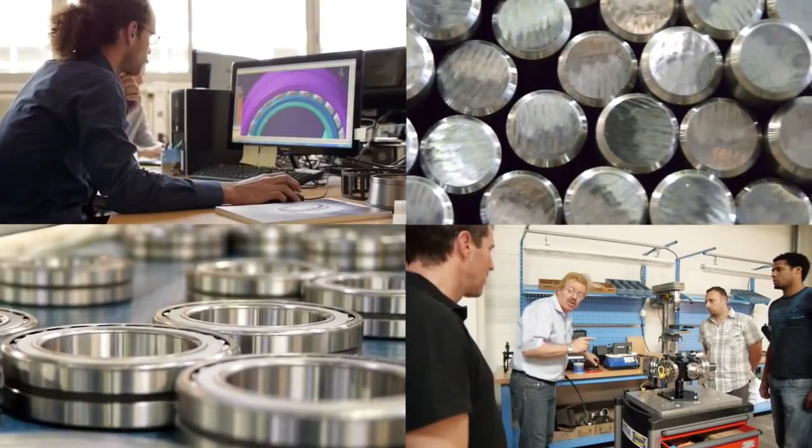The NTN Corporation, the third largest bearing group in the world, is a leading player as both a developer and a manufacturer of bearings for the industrial, aerospace, and automotive markets.

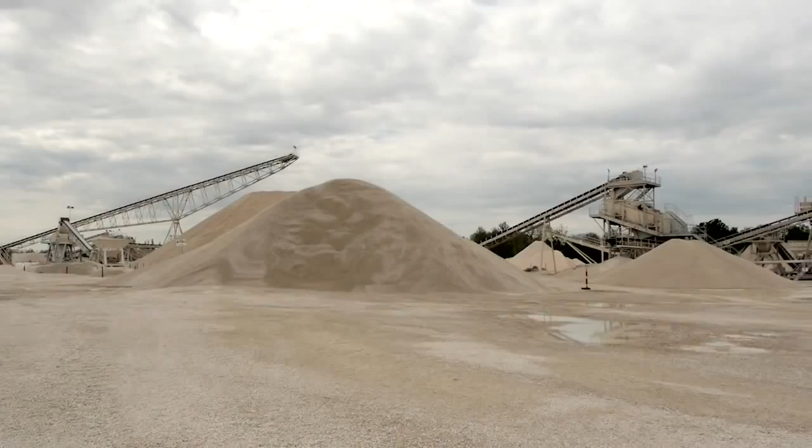In the sector covering mining, ore processing, and the cement industry, bearings operate in an environment that really puts equipment to the test. Many operations take place outdoors, and machinery is exposed to the elements throughout the year. In addition to the elements, bearings must also withstand the mechanical demands required of it during production. Impacts, imbalances, vibrations, combined loads, high rotational speeds, and extreme temperatures.

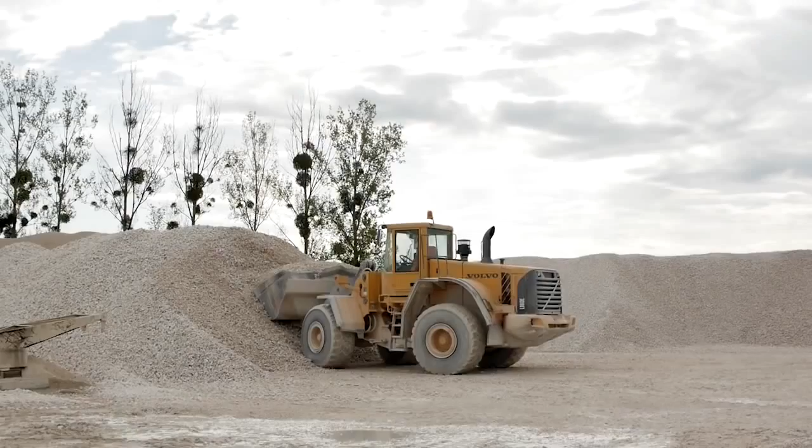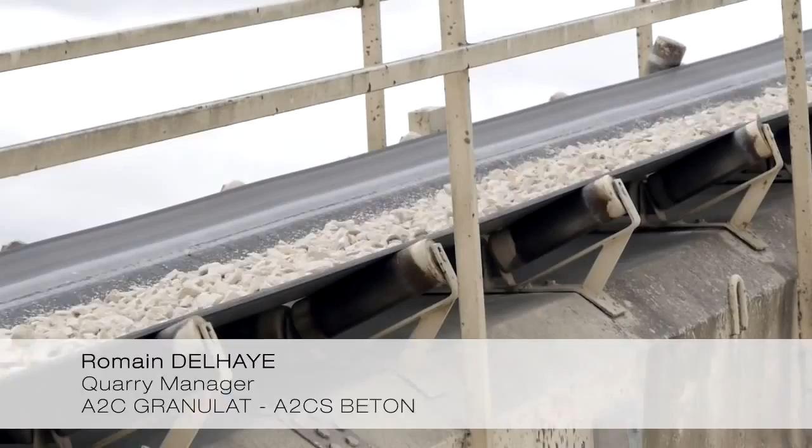Daily output is measured in thousands of tons. The machinery operates on a continuous flow basis and often for long periods at a time, leaving little time for maintenance. Our installation is subject to very high production demands, making availability for maintenance limited. This is why we fit our machine components, in particular the bearings, with the most reliable and durable equipment possible.

Crushers, screening machines, and conveyors. At each stage of the process, bearings play an essential role in a particularly demanding environment. NTN has designed a range of spherical roller bearings capable of handling extreme conditions, vibrations, impacts, and imbalances.

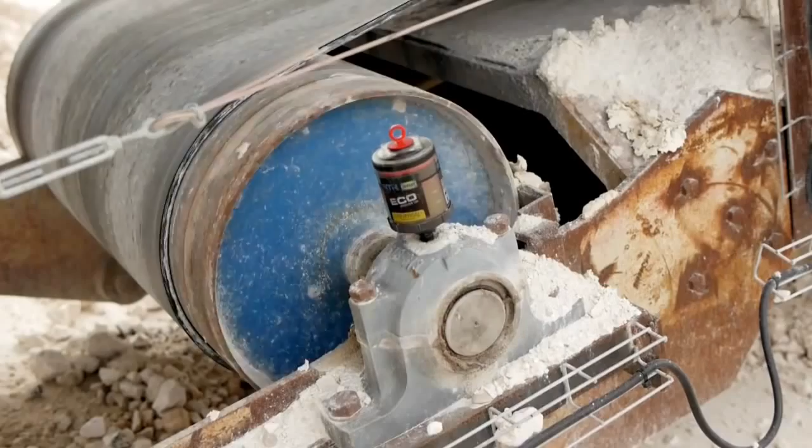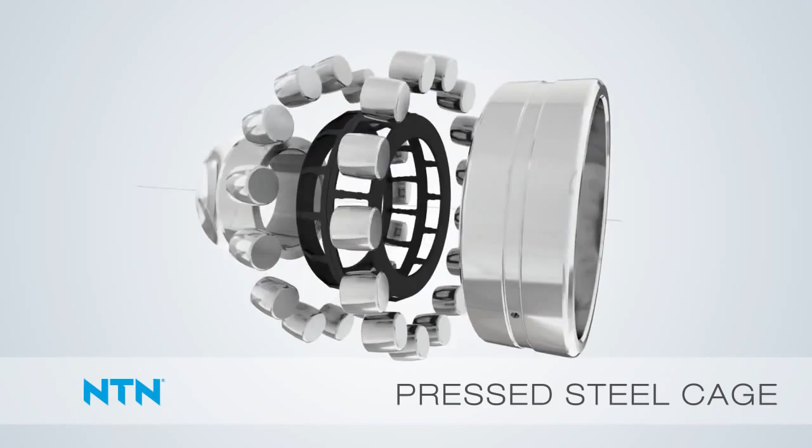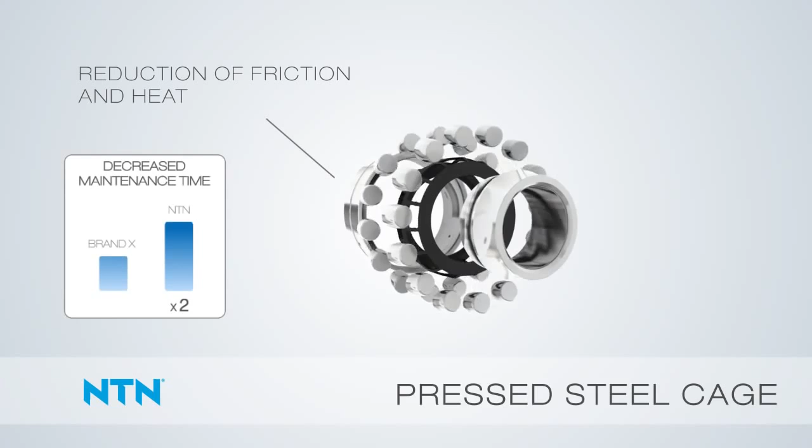Our belt conveyors are subject to stress that is both environmental and intrinsic to their operation. Within their spherical roller bearing range, NTN offers reinforced steel cages which are able to withstand the associated stresses within the conveyor itself. NTN provides a complete solution thanks to our two-part plummer block with its seals and lubrication. The steel cage reduces friction and overheating. This increases the service life of both the bearings and the machines, and that means less maintenance.

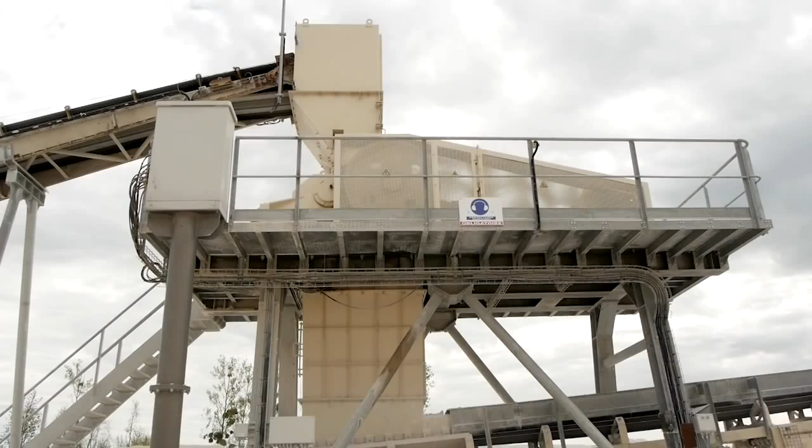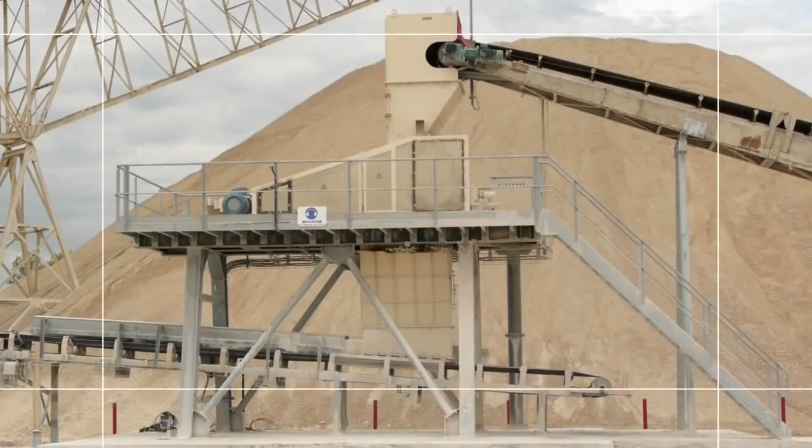The role of the crusher is to reduce the size of the extracted product to produce semi-finished ore that can then be graded on the screens. The crushers are subject to radial stress due to the large amount of impacts and vibration. NTN has developed a range of spherical roller bearings able to cope with this stress. Large-size bearings with machined brass cages are used in the crushers.

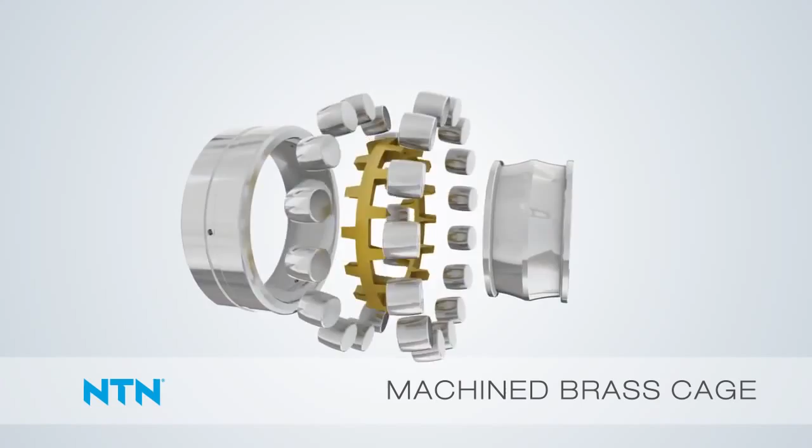Double-row spherical roller bearings from the EF800 range offer a greater load capacity and a longer service life. This is achieved through a reduction in bore, outer diameter tolerance, radial clearance, and by optimizing the size of rolling elements.

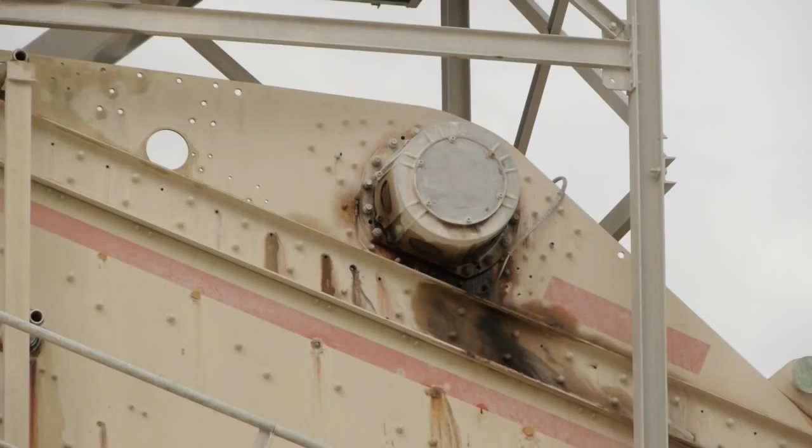The screener's job is to grade ore. We pour the ore onto the screens. Then we use vibrations so that the ore runs off. The vibrations are created by what we call exciters. They are fitted with bearings that are subject to impacts and vibrations. NTN has developed a range of bearings specially designed for screeners.

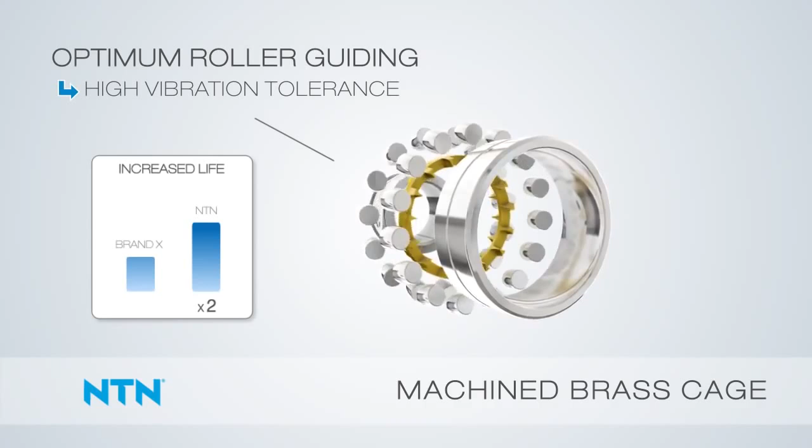The double-row spherical roller bearings in the EF800 range have greater clearance so they can withstand major impacts and vibrations. The solid brass cage has a contoured profile which wraps around the bearings, improving their guidance. This means they can cope with extreme vibrations. These features guarantee a longer service life in your machines.

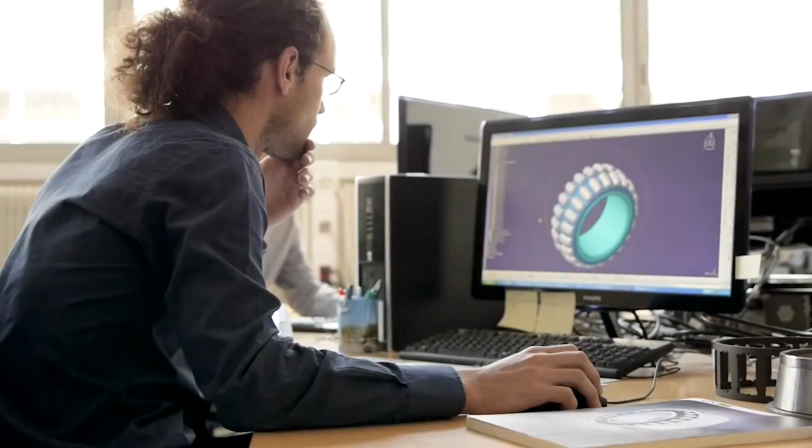We have seen a real increase in on-site productivity thanks to the quality of NTN spherical roller bearings. NTN's spherical roller bearing range offers improved performance. In our R&D center, hundreds of people work on the bearings of the future. They are equipped with numerous laboratories and a test center with more than 200 test benches at their disposal.

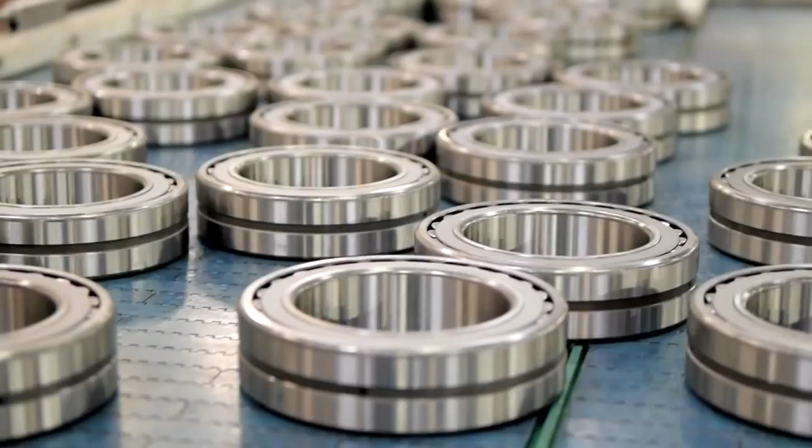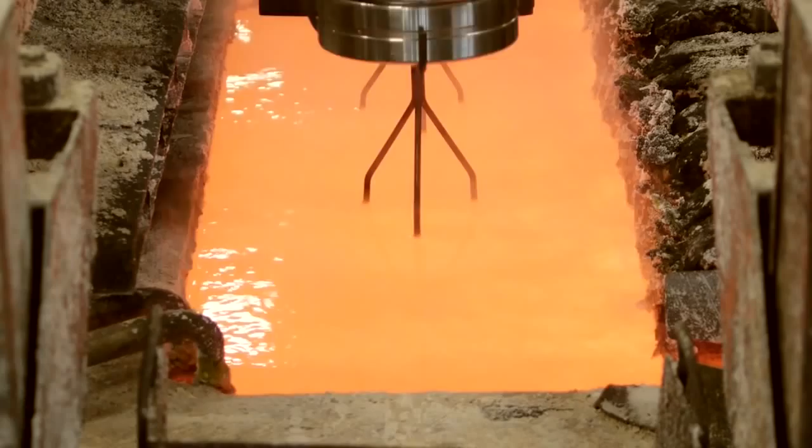Our manufacturing facilities guarantee the quality of the various components used in bearing production through the purity of the steels used and a strict adherence to dimension standards and quality procedures. The specific heat treatment of the bearings ensures long-lasting dimensional stability. The bearings are subjected to continuous quality control at each stage of the manufacturing process.

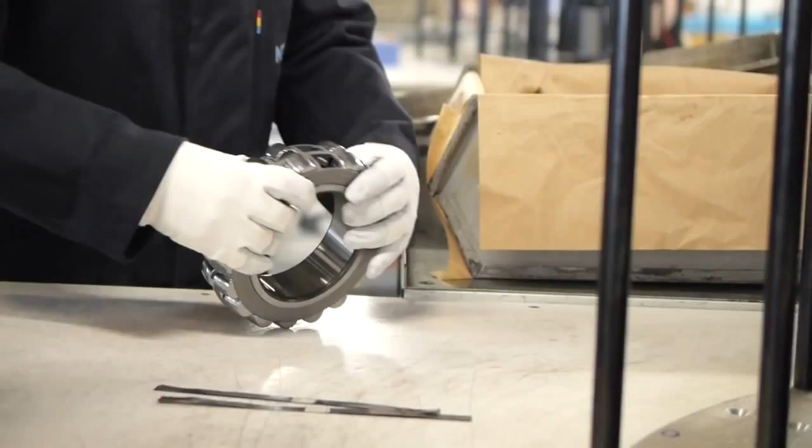The plant also carries out reconditioning services at very short notice. Reconditioned bearings can be reused, thus reducing production costs and environmental impact. Our aim as mine operators is to ensure that site productivity and efficiency are as high as possible. This keeps costs down and limits machine stoppage time.

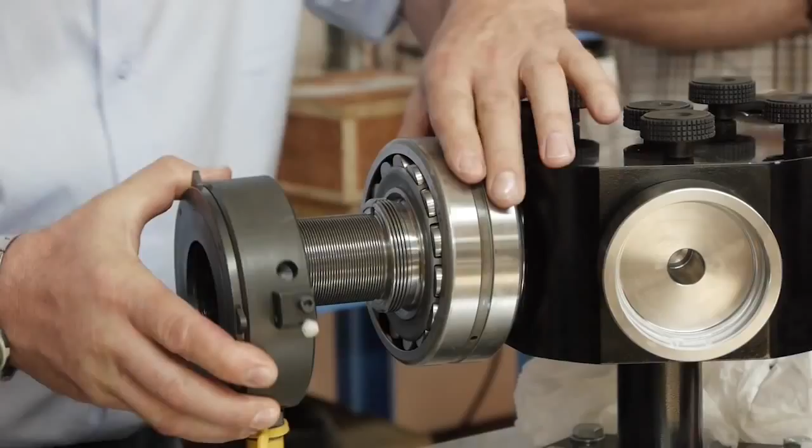NTN's engineering department offers precisely the expertise and the tools operators need to maximize production. Thanks to the Bearing Experts Training Unit, NTN technicians can train staff on site, demonstrating correct bearing handling and maintenance. These personalized training sessions provide us with the autonomy we need. We now plan our maintenance operations according to our schedule rather than our supplier's schedule.

NTN also offers a complete range of mounting and dismounting tools, a wide range of special lubricants designed for harsh environments, and efficient centralized lubrication systems to get the best out of your machines.

Over the years, we have established a genuine partnership with NTN. They assist us in choosing bearings and lubricants. They also help us in all service areas and consequently with the maintenance of our sites, resulting in the ability to improve productivity thanks to increased equipment availability. NTN, committed to technological excellence for your peace of mind.